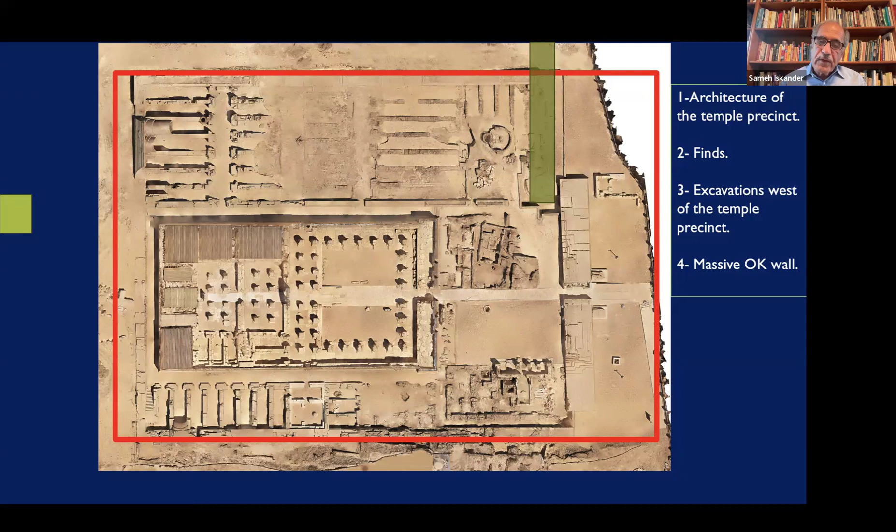Here is a sort of 3D, 2D illustration of the temple, just to make it easy to go over this. This will be my basis for the discussion going on. And here is to the west. We did excavation to the west and then to the north here. So I will organize my talk, excuse me. Okay, I'll organize my talk. I first talk about the architecture of the temple. Then I'm going to talk about the finds, and then about the excavation to the west, and then the Old Kingdom wall to the northeast.

Our first goal in the excavation was to identify the enclosure wall. And we finally identified it, and they started to work inside. So the enclosure wall is mud brick, 3.5 meters thick. So we estimate the height would have been maybe 6 to 8 meters high, because the height is usually 2 to 3 times the width.

And so it's almost the same height as the temple. So the temple really was not visible from outside. And that enclosure wall must have looked like a fortress from the outside. And we didn't know the details of the top of the enclosure wall, because whatever was remaining varied from a half meter to a meter, to sometimes 2 meters.

So the stone temple inside here is usually the focal point of interest to scholars and visitors, as the surrounding brick wall was not of interest. The surrounding big structures and wall were not of interest, because it's mud brick. It's mostly broken. It's not very interesting. So my talk today is about this. This part is the surrounding structures around the temple, the mud brick structures. The stone temple, we already have done that, and it is not part of my presentation.

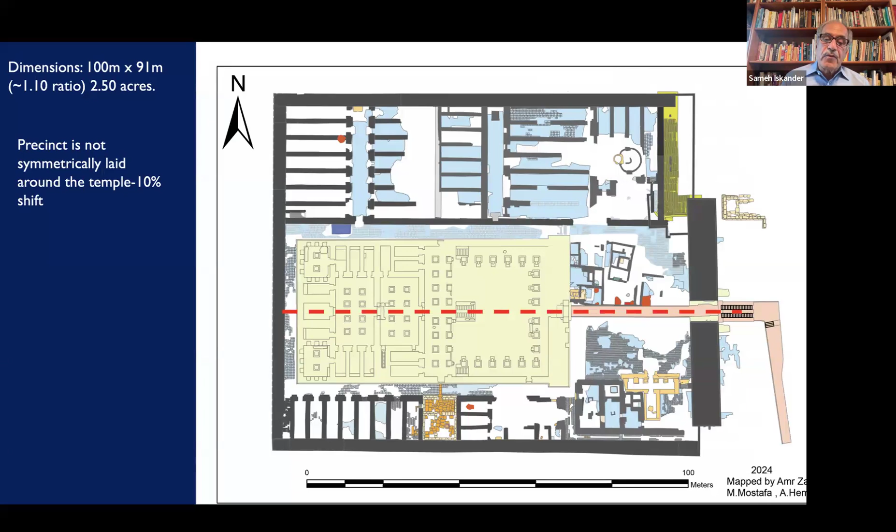This is a survey of the temple. The entire precinct is 100 meters by 91 meters. And the temple is not symmetrically laid within the enclosure wall. And just to give a background of how this temple compared with other Ramesside temples in Thebes and Abydos: our area is 2.5 acres, Medinet Habu is 16 acres, Seti the First 14 acres, the Ramesseum is 12 acres, and Merneptah had 3 acres. So the temple of Ramses is definitely the smallest temple of this entire group.

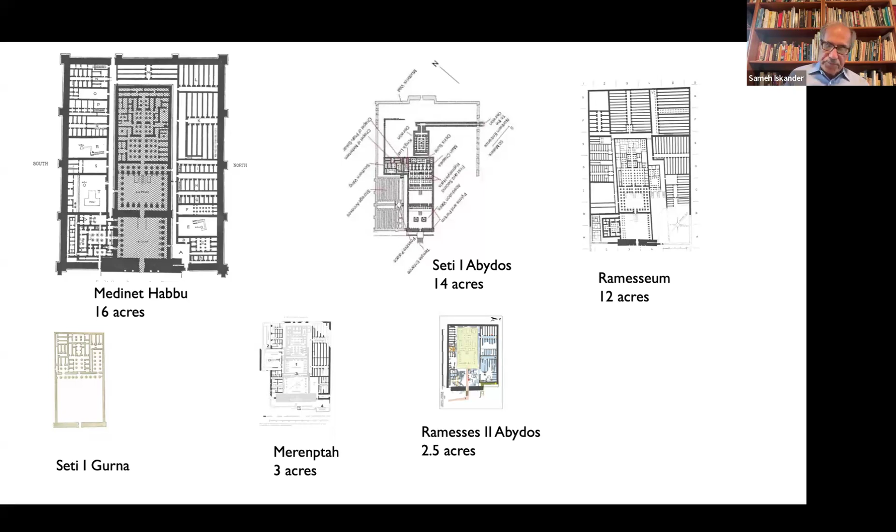Can you move, Christina, can you move this? Yeah, I want this, I can move it myself, okay.

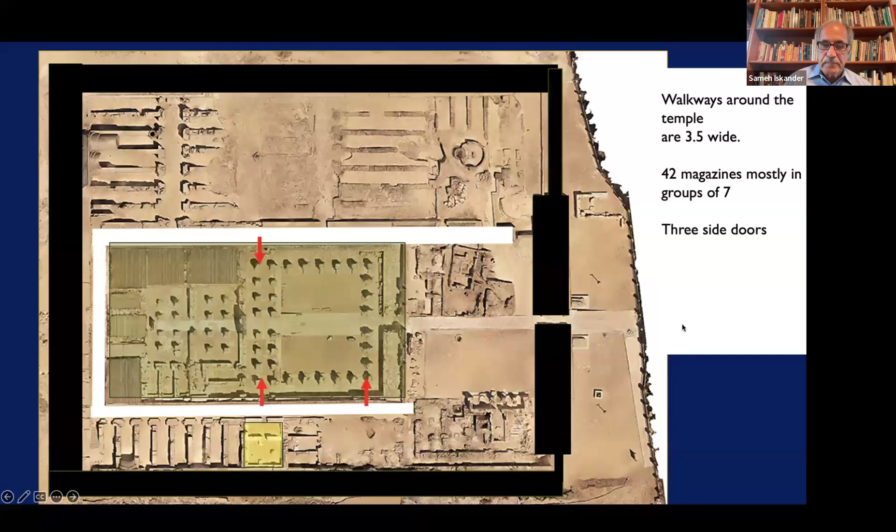So we start looking at the architecture of this precinct. The walkways around the stone temple itself are 3.5 meters wide. There are 42 vaulted roofed magazines, mostly in groups of 7, and the 3 side doors to the temple, as you see in red. Okay, and here are the 3 walkways around the temple. And there are 3 doors, as I mentioned, 2 on the south and 1 on the north, and they're marked here by the red arrows.

These walls had elaborate, dazzling inscriptions like any ancient Egyptian temple, but they could not be viewed from outside the precinct because the walls were as high as the temple, and they could only be viewed from these relatively narrow walkways. For example, we have the Kadesh inscriptions on the west and north of the temple. And you can see all these intricate details that go up 7 or 8 meters. And you even have here the poem, which also goes the same distance. So it's very difficult to really be able to see this.

If you look at the sketch that I have on the right, how can one see all these inscriptions all the way up? So who was the intended audience for this? Obviously, the walkways were very much restricted access. Even for people who are there, it's very difficult to read or view all these inscriptions. So the audience, in my opinion, was the deities, the gods. These inscriptions were for the protection of the temple, and were not really for propaganda, as is sometimes posited.

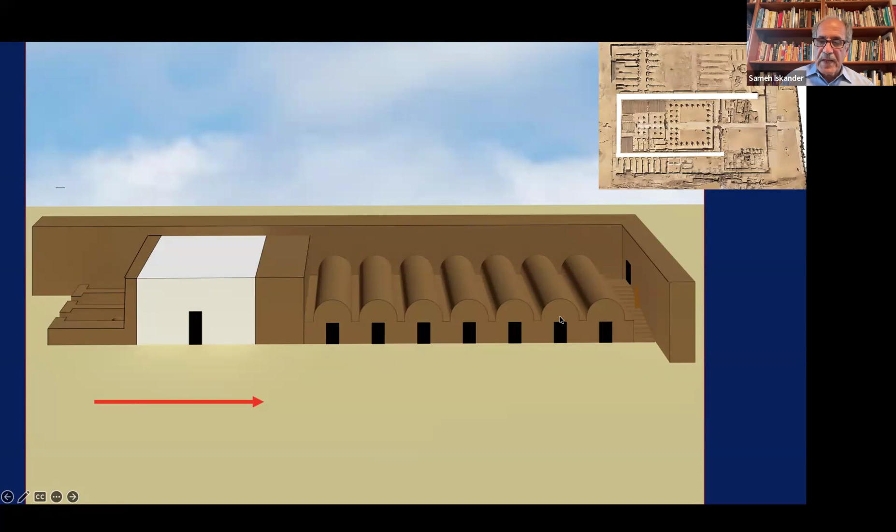On the left, we see here the large kiln that I mentioned. I'm going to show it now, and then the Temple Palace and seven magazines and stairs. Here is the large kiln, very well built, and it's interesting. It's located in a very prominent place of the temple, right next to the Temple Palace.

And we have some of the, it's mostly faience, and then plates for small amulets that we found, faience amulets. So it's interesting that the manufacturing of the faience amulets would be done in a prominent place in the temple. And here is a 3D of this kiln.

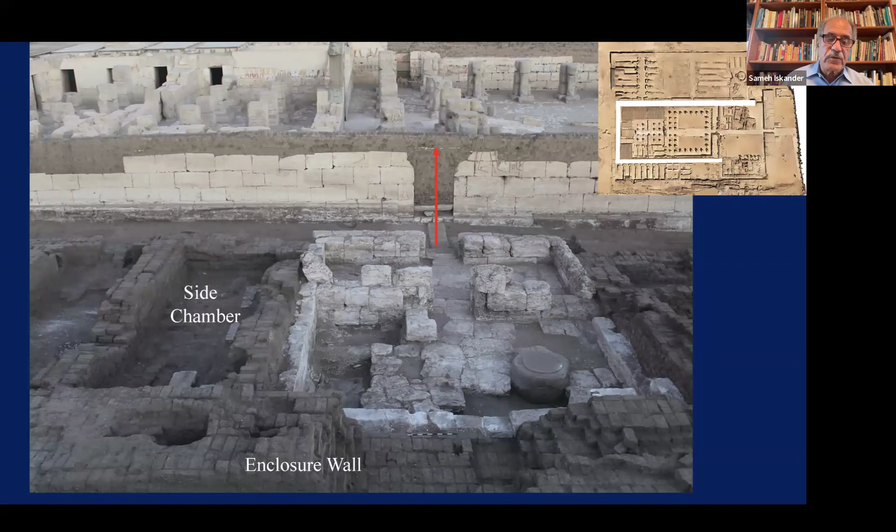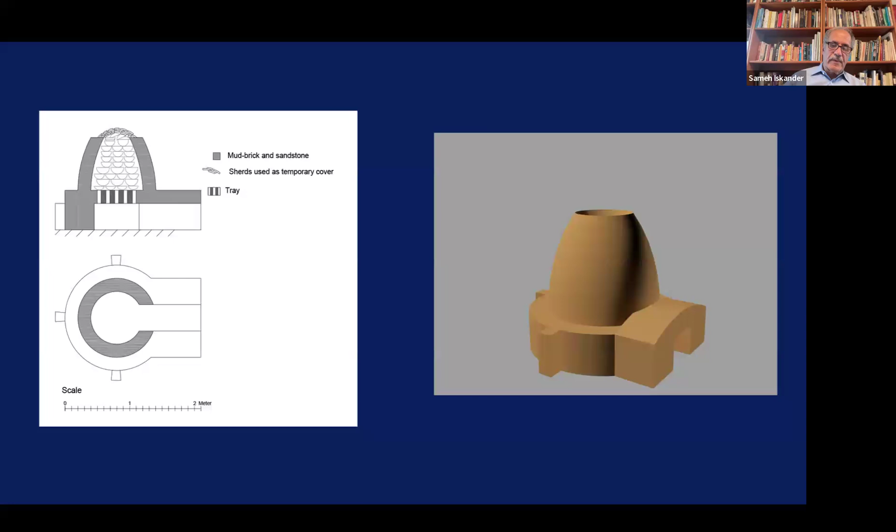And here is the Temple Palace with an entrance to the court, second court. And it's built of, sorry. Going backwards. Sorry for that. Okay. Sorry for this.

It's a plan of the Temple Palace. And it differs from the Temple Palaces in the other Ramesside temples in Thebes, because this is built of stone. So it may have been an administrative office, but it fits also the location of the temple palaces, so it's somewhere in between.

But anyway, we found a burial here, and we have several burials that I will mention, of a bull or a cow, very carefully buried. So it's probably related to a local cult such as Buchis of Armant, or generally Serapis. It's dated to the Ptolemaic period according to the ceramics.

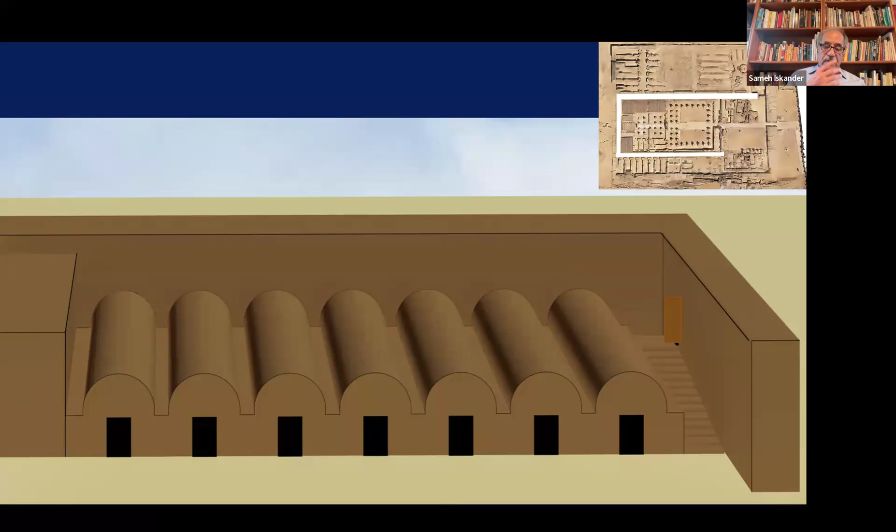And then we have the 7 magazines and stairs to the right. And we rebuilt some of these vaulted magazines. And I'm going to get to this a little later.

And here we have a scene published from the tomb TT 157, showing how the grain is brought up to the top of the vaulted magazines from the stairs that we see on the right, and is sort of dumped from the top and taken out from the side doors.

And here are the 7 magazines. And where the red arrows show, there were holes punctured into the walls, and we found inside skulls of cattle. So we found about 14 of them, a very unusual way to bury the cattle inside the mud brick walls, and then pack them in, and then close the holes.

We also excavated around the corners of the temple, looking for foundation deposits. And in this corner, we did find underground the cartouches of Ramesses II. Here are the cartouches in very beautiful golden yellow paint. And underneath, we found a large foundation deposit with different objects, as you see.

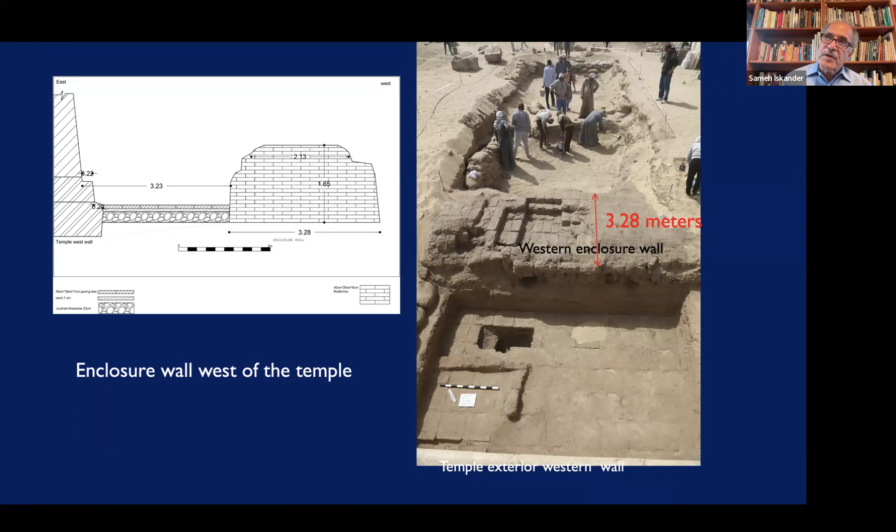In the western area, it's this very narrow walkway between the western wall and the enclosure wall. And here is, just to give you an idea, the enclosure wall, which is about 3.3 meters wide. And here is a cross section. So we built this wall to a height of about 3 meters for protection from entry and also from the wind-blown sand.

In the north area of the precinct, the way we found it is very different from the south. There are 32 magazines, mostly in groups of 7, again, separated by corridors, except that the top right here, there's a group of 4 magazines. And the magazines in the middle are completely destroyed.

Well, before I get to that, this is the corridor and the 7 magazines on each side of the corridor. And at the end of the corridor here, you see a chapel with a limestone base. And there would have been here on top of it an arch. So some of the magazines did not have stairs. So again, like another scene in TT60, this is how the other storage items were brought in, such as wine jars and ritual equipment.

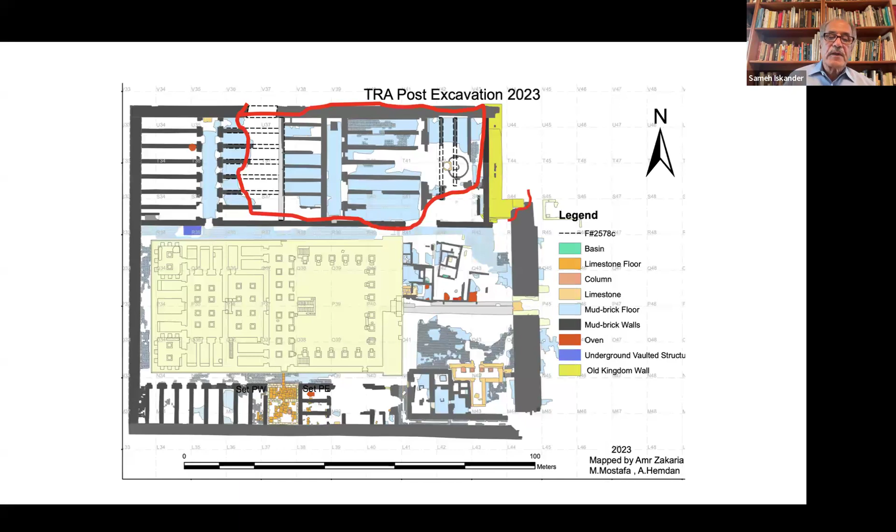So this area in red was completely destroyed. And this is how we found it. And there was an 8 meters deep well that was dug in there. Here is the well. And you look back, you see the entire part is completely wiped out, destroyed. We went down 8 meters till we reached the underground water. So during the late Roman period, all the mud brick was crushed and leveled, and this was used as a field.

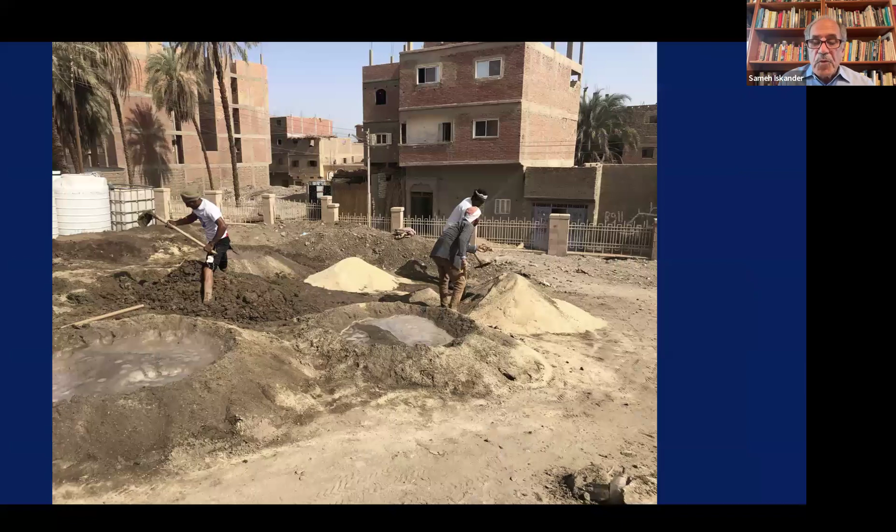And we have about 50 to 70 centimeters deep of clay that came from the crushed red mud brick. So we removed this layer and we mixed it again, and we created our own bricks. So this is the resurrection of bricks. So it was mud, became Ramesside bricks, crushed in late Roman, then we took it and made bricks again.

The magazine storage capacity in this temple is about 3,700 cubic meters. To compare it with the ones in the Seti I temple, it's a little bit over 11,000. So in total, we have 15,000 cubic meters of storage that was built almost at the same time.

And this is the equivalent of 200,000 sacks or khars. That's a lot of storage. And mostly, I would say this storage was for grain. Again, a lot of sacks. And so this new storage must have altered Abydos' economic landscape. This will be a basis for a study of the economy of Abydos there.

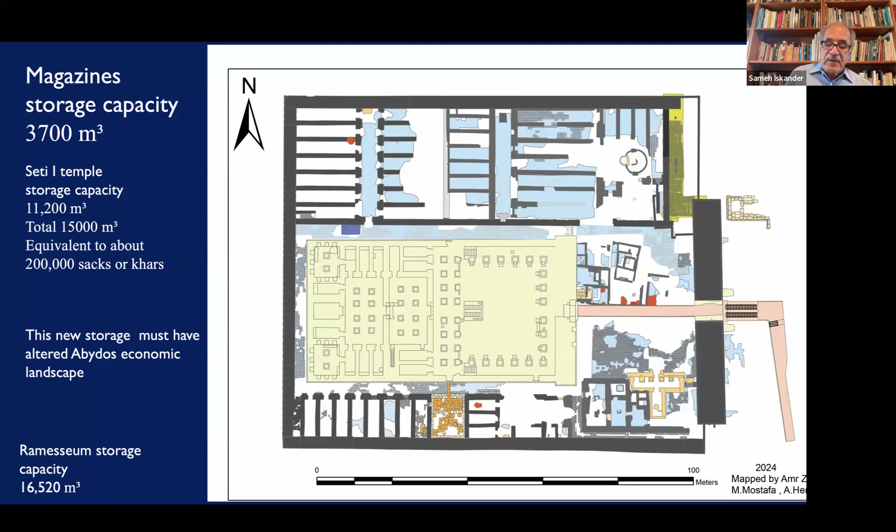Just for comparison, the Ramesseum storage capacity is 16,500 cubic meters. So within the first couple of decades, Ramses had something like over 30,000 cubic meters. Probably he needed this for his building activities and wars in the north and the south and the west.

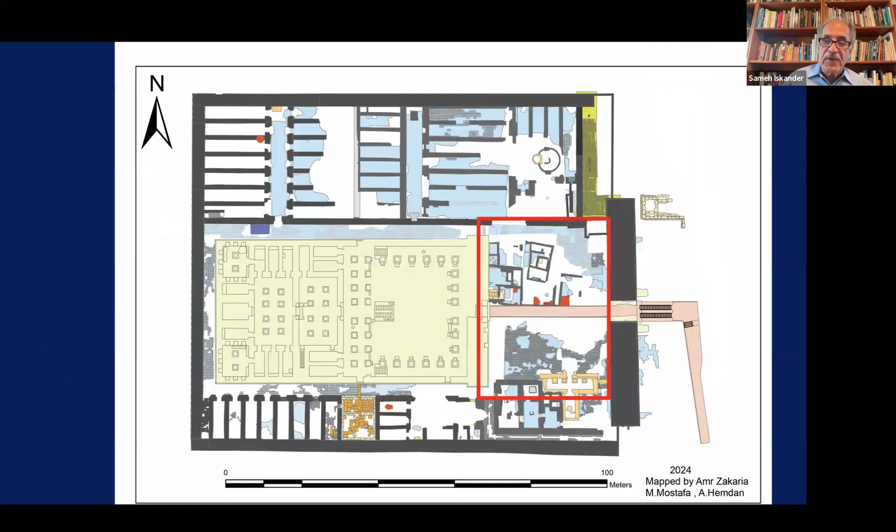It was mostly an area of probably workshops, because we found a lot of kilns and storage objects. And the one to the right was the original floor of the Ramesside period, which, interestingly enough, was mud brick. So as the visitor enters, to the left, this is part of the history of the temple, where in the late Roman, Byzantine period, the Copts moved in and built their own structures there. And to the right is the original floor.

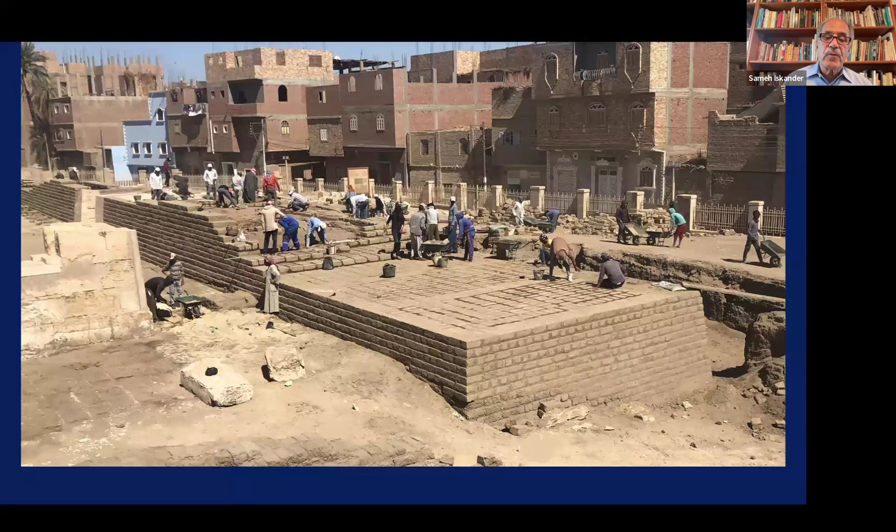So we still needed to build the pylon, the two sections of the pylon, because nothing had survived except the foundation. And strictly, we see here on the inscription in the south wall of the temple the two great pylons. So we did build this pylon of mud brick, because the foundation was mud brick. And we built a walkway of limestone, because the foundation was also found to be a limestone walkway. And here is our pylon. We went about 2 meters high. And here is the entrance to the pylon after our restoration.

And now I'm going to switch to the finds in the temple. We have this Third Dynasty granodiorite head, not only extremely rare, it's unprecedented in Abydos. No remains of the Third Dynasty were ever found in Abydos, because the Third Dynasty moved to Saqqara. This head is not inscribed, but it clearly has the stylistic features of the Third Dynasty. We compared that with a corpus of 23 published Third Dynasty statues. You see the serrated wig covering the ears and ending in a kind of flat cut, and the receding forehead. And I'm just showing here an example of three others.

We also found a fragment that is obviously Amarna style. We compared it with the Amarna princesses, with the wide buttocks and thighs. And this is the back. The back was flat, and we have this flint part of it, which we don't understand its purpose, or it was part of the stone.

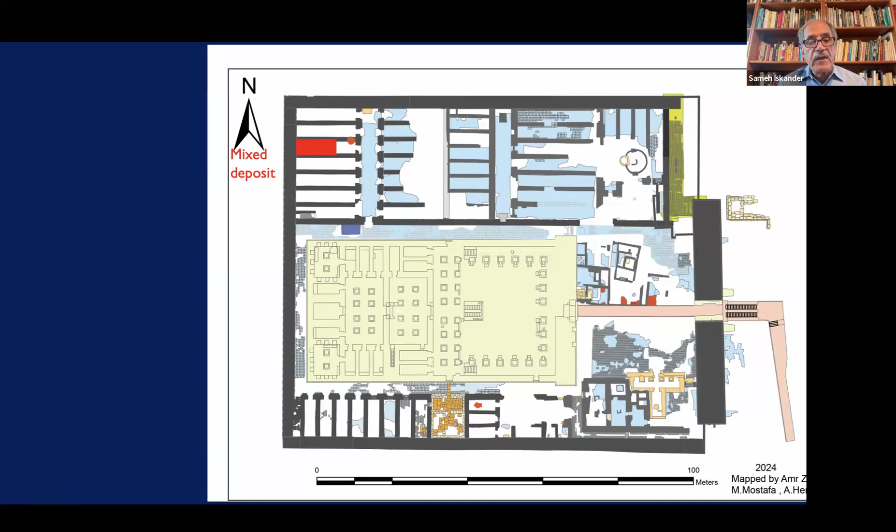And now I want to go to a deposit that you see here in red, right here. And all were deposited in this magazine at the same time, one large deposit. And that's how it looked, with completely different objects there. So the way the deposit was found clearly indicates that it was brought at the same time. There's no stratigraphy here. There's no layers. And we have different objects.

One of the objects we found was a roll of papyrus that Muhammad Ibrahim, our restorer at the time, managed to completely unroll. And basically, there were two different papyri. In Demotic, this was translated by Dr. Richard Jasnow. It was inscribed by different scribes during the reigns of Ptolemy VI and Ptolemy VIII. And the papyrus contained a record of shipments maintained for a period of many, many years between the two dates I mentioned.

And it contains locations of shipments that were either shipped or received, mostly wine. So we have 19 wineries, but it also includes other material. And here is the list of all the destinations. And as you see in red, these are all wineries. So it's interesting that Abydos was very active from a commercial point of view. There were a lot of export and import of objects, not only wine, but we have honey, wood, things which were on the sacred bark, bread, beans, heather, sheep.

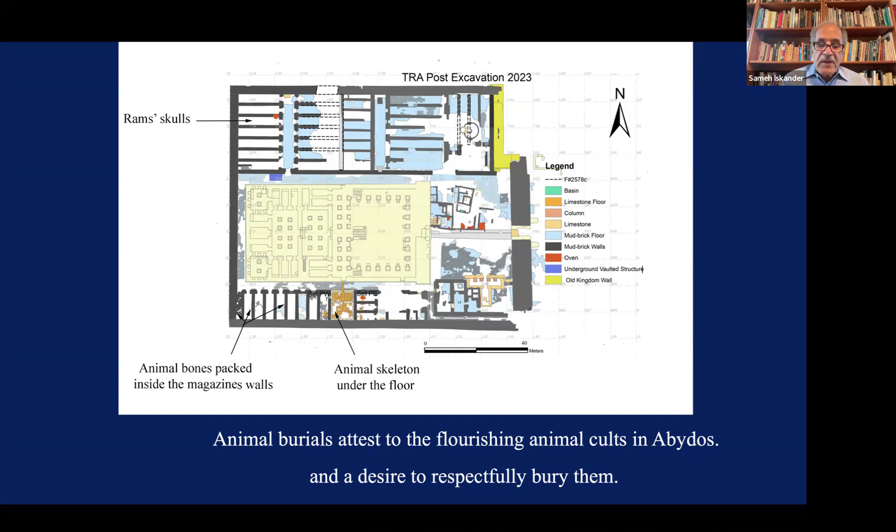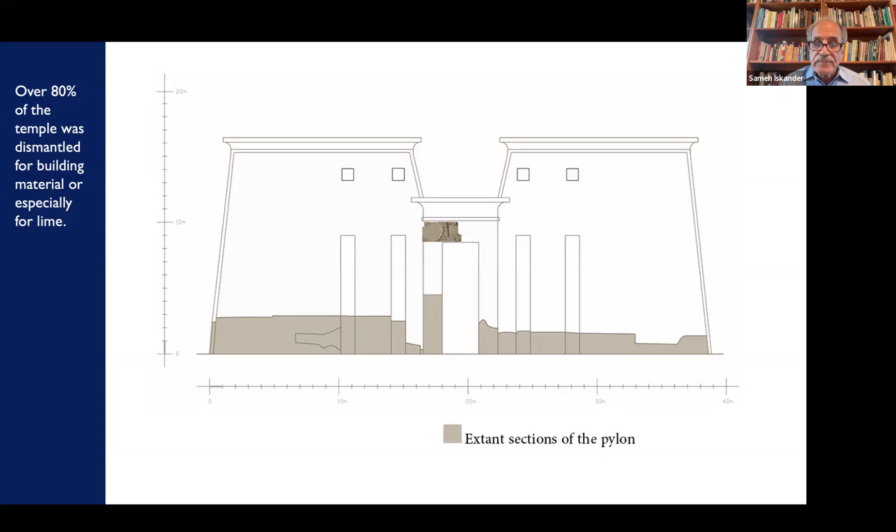And as I said, when did this happen and where, and for what reason? So we know one of them was for building material. What we have left in the temple is only 20% of the entire temple. So 80% of the temple is gone, probably for building material or for another reason.

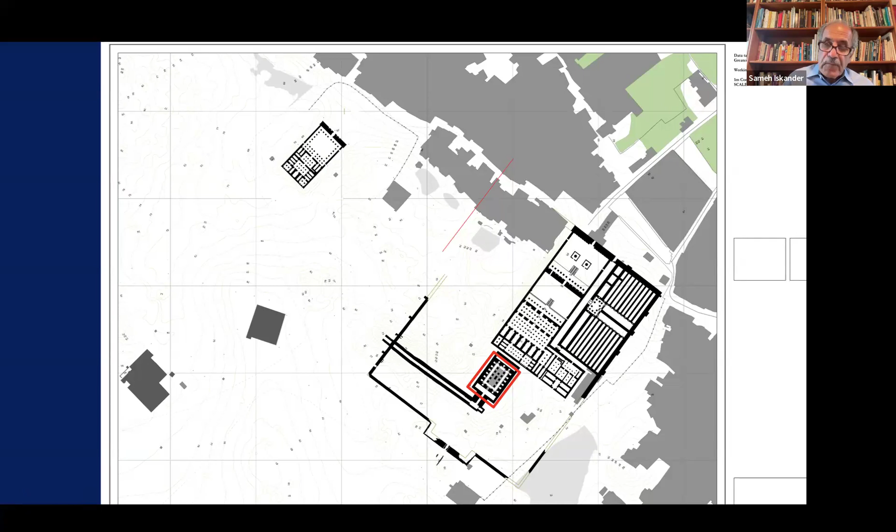Also, we were curious to see if there is a structure west of the temple, similar to the Osireion, west of the temple of Seti I, right here, which seems to be what's happening with many of the monuments in Abydos. The Temple of Osiris has association with Umm el-Qa'ab. The Temple of Seti has association with the Osireion. Same thing with the Temple of Senusret III, his tomb. Ahmose also with the tomb to the west. They're all associated with western structures. So the Temple of Ramses had the same thing, and that's why we started the excavation here.

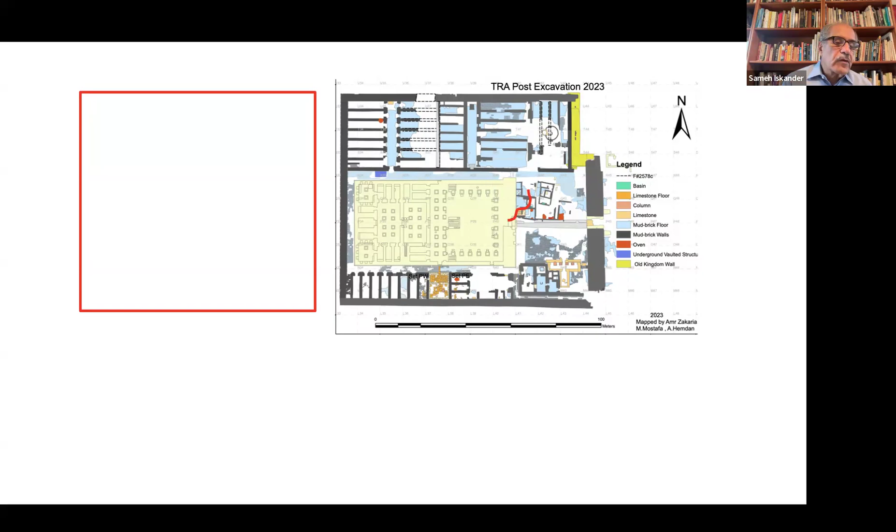We did some excavation several years ago, but we went only 25 meters. This time we went 120 or 150 meters to the west. And we really did not find anything. What we found, about 50 centimeters below the surface, there is hard tafla, marl, with sort of poor burials all around. Just this hard marl. All these sarcophagi or burials were dug into this layer.

And to our surprise, we found 16 tombs, mud brick tombs, which we did not expect at all. And this came at the very end of our season. So this is probably the last, we worked the last day of our excavation trying to clear this one. So we have to go back.

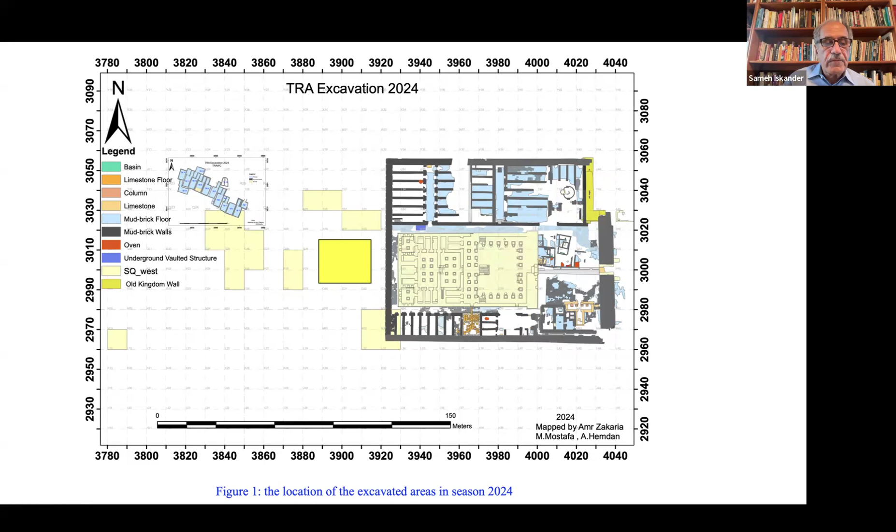And this is the one to the right here. This is the 16 tombs that we found. And we dated them to Thutmose III. And here are the 16 tombs. And you can see it right here in a very intricate architectural layout. And they all have barrel vaults, similar to the one in the temple.

So this is really work in progress, and we need to go back and continue work in this area. And it all seems to be oriented toward the chapel of Thutmose III at the entrance of the Osiris temple.

Our final presentation here is the northeast corner of the temple. While we're excavating for the foundation of the pylon of the Temple of Ramses, we came across a perpendicular Old Kingdom First Intermediate Period wall that was cut to accommodate for the new pylon of Ramses, built in 1279, and this is dated 1,000 years earlier.

So what we have here, this is the pre-Ramesside Old Kingdom wall, was continuing to the right, but was cut, and then Ramses built his pylon here. And it turned out to be a massive structure that comes from the east, west, and turns north, with a buttress that goes, as you see here, sort of a quarter circle. And the wall extended to the north at least 164 meters. So this is a huge structure.

And it is obviously some sort of an enclosure wall that comes from the east, turns and goes up to the north. And here is a view looking west, and here is the buttress, and below the pylon, and a plan of what we found that season. And the red is the pylon. So the wall obviously extends to the east, and I said 164 meters to the north.

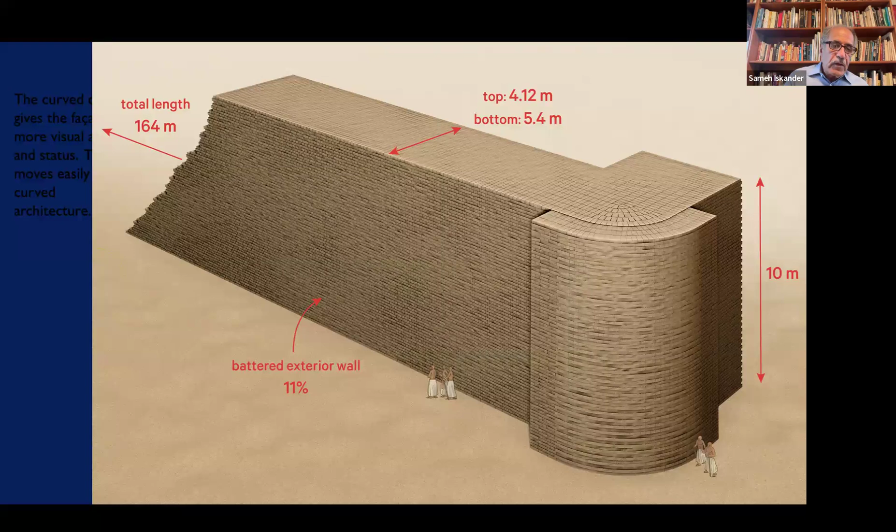This wall is 5 meters wide. I didn't mention that. So it must have been at least 10 meters high. That is a very, very huge structure, maybe 15 meters high. For those of you who have been to the Shunet, it's as high as the Shunet. Huge structure. We kept excavating north, exploring north really. We found a doorway at the very end with a very well preserved limestone gateway.

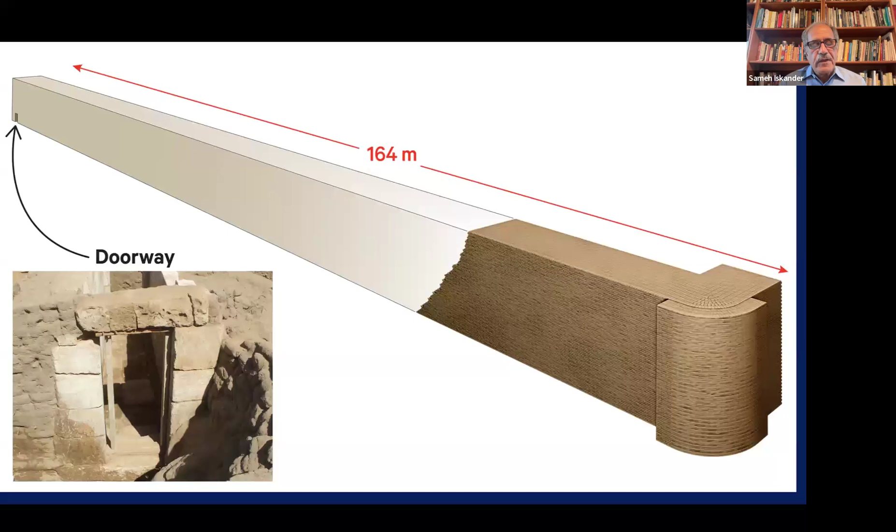So this is a completely different landscape that we have now. This wall is an enclosure wall. This is the entrance. Before I get into that, this is the gateway, and the wall extends. This is our temple here, and it goes this way, and here to the west, to the north, and to the south, the temple, and here is the gateway. And on the gateway, there is some graffiti, maybe related to it.

For this, we went back to investigate the other large provincial enclosure walls dated to the late Old Kingdom First Intermediate period, in order to provide some kind of a comparison or synthesis of building activities during this period of late Old Kingdom. So we went to Bubastis, Edfu, Kom Ombo, Elephantine, and Ain Asil. I didn't go to Ain Asil, but I have the records here. They all have similar walls, more or less, built around the same time.

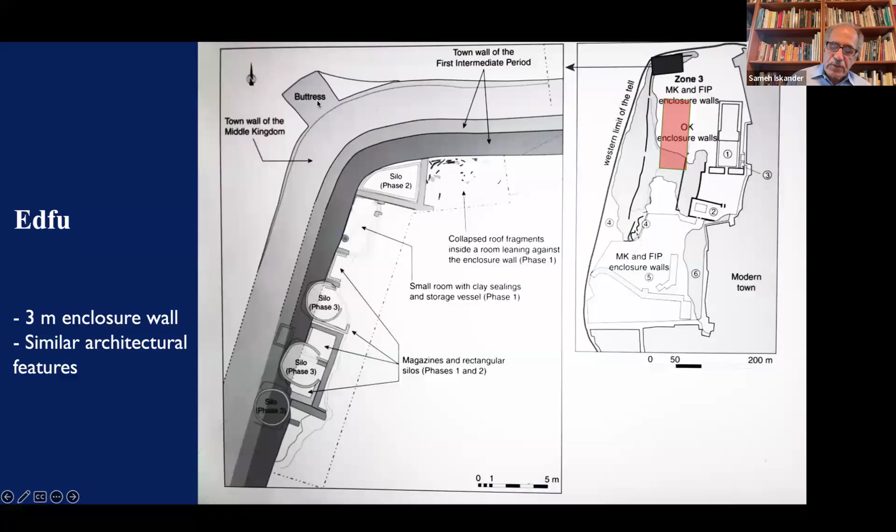So in Bubastis, there's a 4-meter enclosure wall with a gateway very similar to ours, almost the same dimensions. And inside there's a chapel, a temple, and a settlement. In Edfu, the enclosure wall was built during the First Intermediate period, our period, and has similar architectural features like the round corner and the buttress. And inside there were administrative quarters, storage facilities, and residential area of the local elite.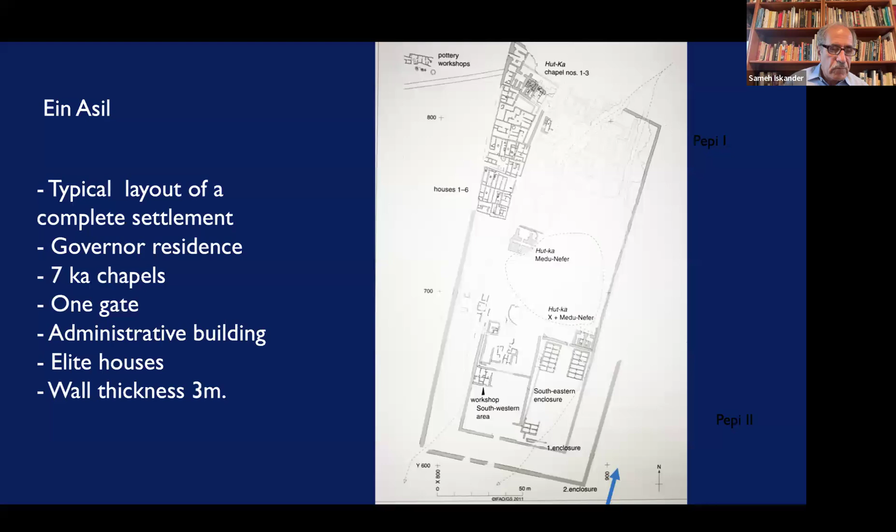Similar features in Kom Ombo, with the remains of a settlement. Elephantine, the same thing, but the one in Elephantine was really built during the First and Second Dynasty, but was enlarged during the Old Kingdom and First Intermediate period. Inside there is a settlement and the governor's residence and ka chapels. And Ein Asil, similar thing with one gateway, very similar to ours, and inside the same structures.

So to look at the gateways, they're very similar. They were built at around the same time, almost the same dimensions. And within them, there were governor's residence, ka chapels, administrative building, elite houses, and one gateway.

And this is our plan this coming season; we have our permit. We're going to start to see what is inside here, and I'm convinced that right here we have a settlement with all the other buildings that I mentioned: governor's residence, elite residence, and ka chapels. So stay tuned, and I will let you know sometime soon after this.